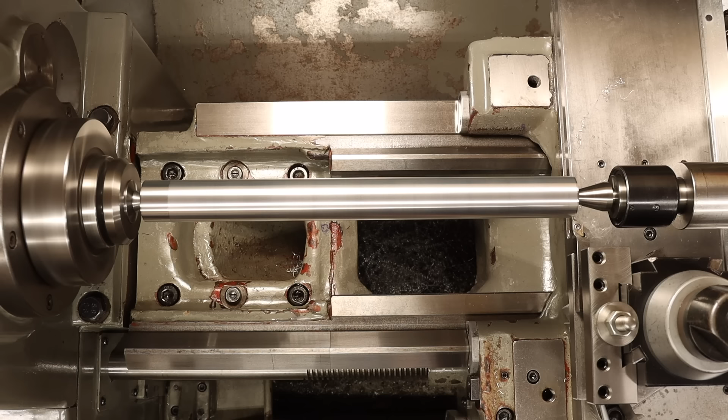This isn't the video I wanted to make because I made a mistake. A mistake that I've been living with for the last 3 years, 2 weeks, and 4 days. That's 26,712 hours of frustrating workarounds, 1,602,720 minutes of self-righteous ignorance, 96,163,200 seconds looking everywhere but at the problem itself, thinking the problem was too big to bother until the bother became bigger than the problem, and the problem, as I would discover, was a lot smaller than I thought.

So the mistake. We'll get to that in a bit, because first I have to talk about the problem. This lathe is not very straight. I mean, to you it probably looks fine, but straight is a relative term in machining, and relative to my standards, it's not straight at all. The trouble with an unstraight machine is that it makes unstraight parts, so almost everything I turn with this lathe comes out slightly tapered, unless I give it a calibrated whacking.

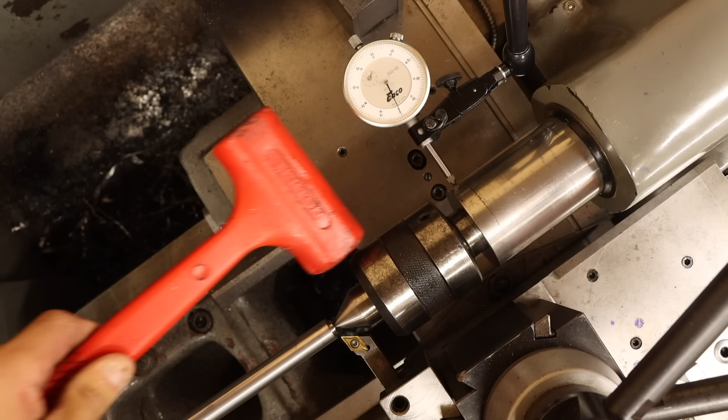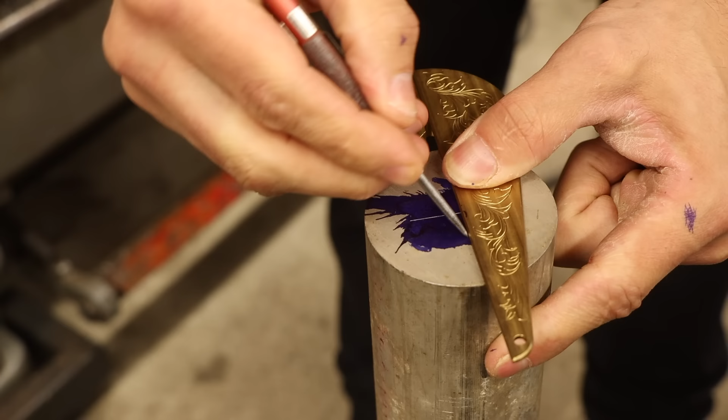Now, a few years ago, I did give this lathe what I considered at the time a proper leveling job, but my standards have since increased, or more accurately, my patience has decreased as I'm tired of working around this wonky lathe. There are a lot of factors that could be causing this, so I'm going to start with a bar test, which is exactly what it sounds like unless you're a law student. I'm going to turn the longest bar I can and see how straight it comes out.

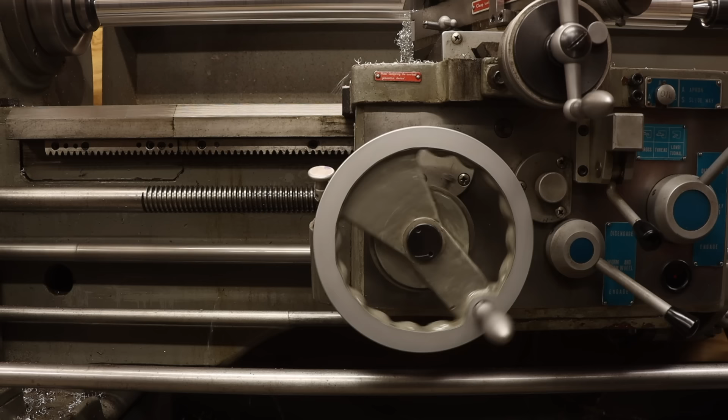If this lathe is all wonky, the bar should match that wonkiness, giving me an idea of where I need to pay attention. This also happens to be the largest single part I've ever turned in this machine, between centers no less. But this is necessary so I don't end up with any other outside influences like a chuck throwing another variable in the mix. I only want to look at the effects the bedways have on the carriage as it goes the full length.

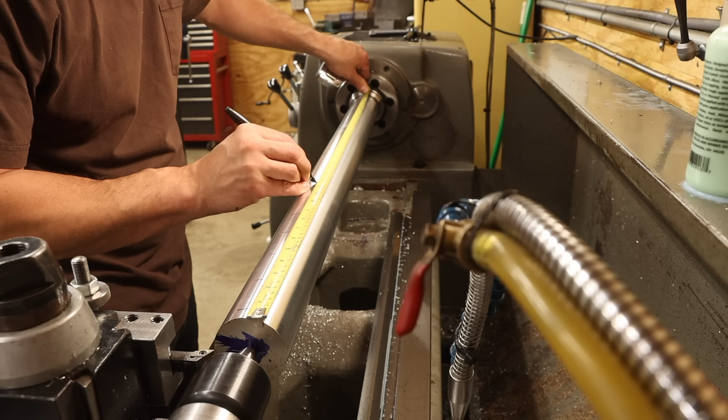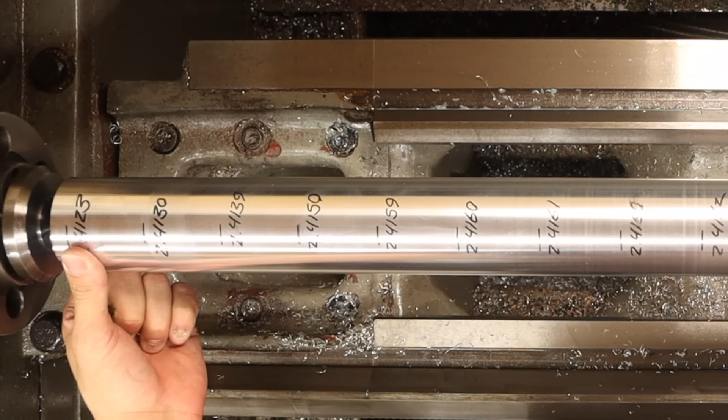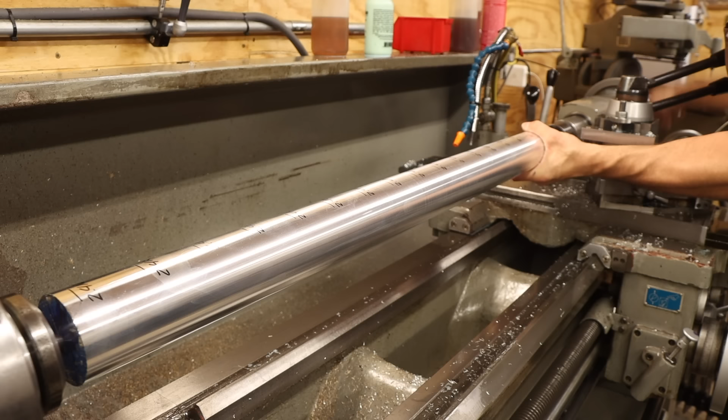Ignoring my arbitrary hand gestures, it's clear there's some variation here. A pretty steep increase in diameter of about 4 thou in the first 8 inches, then it sort of hovers there through the middle and drops 1.5 thou in the last 10 inches. So a max variation of 4 thou, or about the thickness of a single human hair. A lot of people would probably say that's good enough, but not I. The good news is now we know where we stand and all we have to do is make it better.

Last time I did this, I used a precision level on the lathe's carriage and moved it around while I made adjustments to the leveling feet on the ground. More important than leveling though, the feet are needed to twist and contort the lathe so that it comes out straight, something that it won't do just naturally because of its sheer weight. The trouble with my approach last time though was that the carriage is so wide it ends up averaging out the wonkiness of the bedways, making it harder to really nail down what's going on. So we're going to skip the carriage altogether and design a fixture that will hold the level for us.

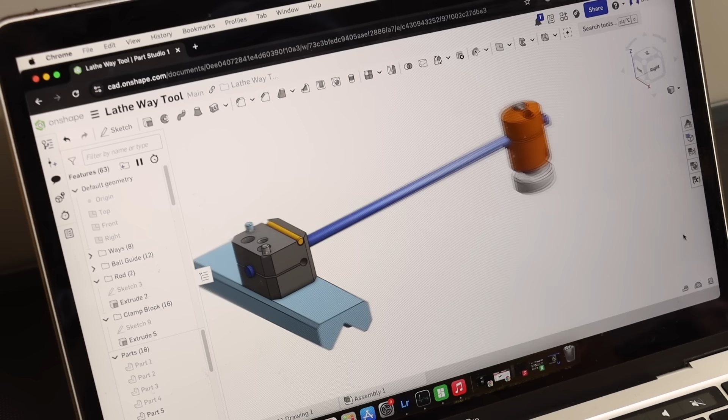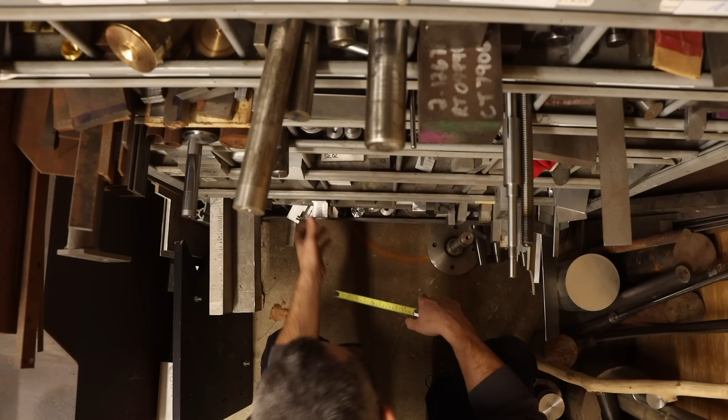Alright, here's the design. There's this piece, this piece, this piece, this piece, and this piece. You know, I think it'll be a lot more fun if I just explain as I go. So let's start with this piece. It's going to basically be a long V block with some balls. Before I can add the balls, I need the V, and before I can add the V, I need a block. But of course, not this size.

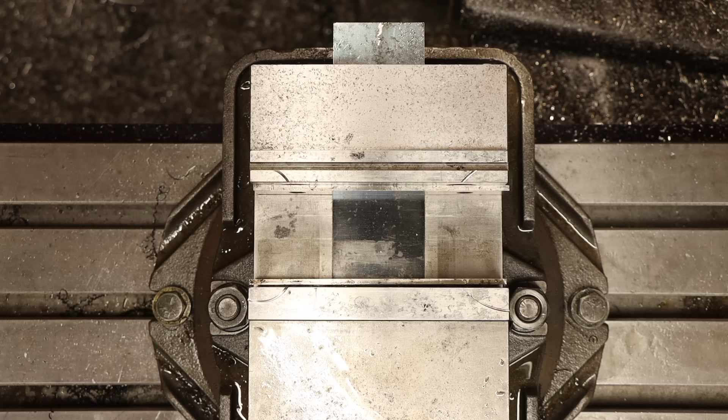I'll probably never use this offcut, but somehow this makes me feel better than the alternative. Anywho, now we can buckle in for a mesmerizing massive fly cutter sequence.

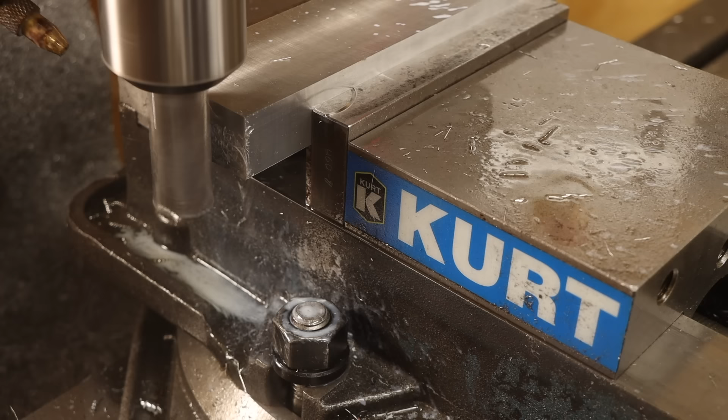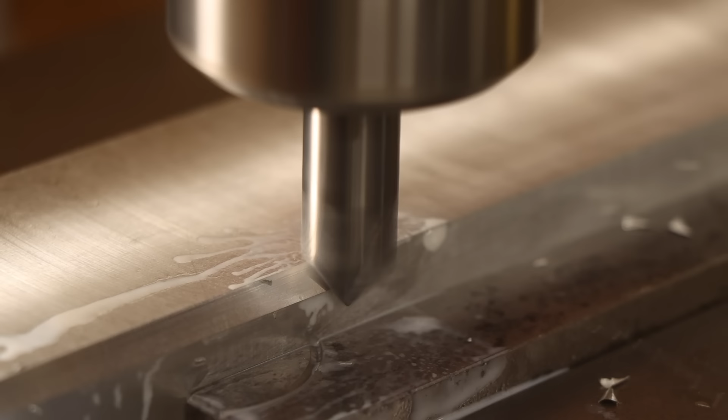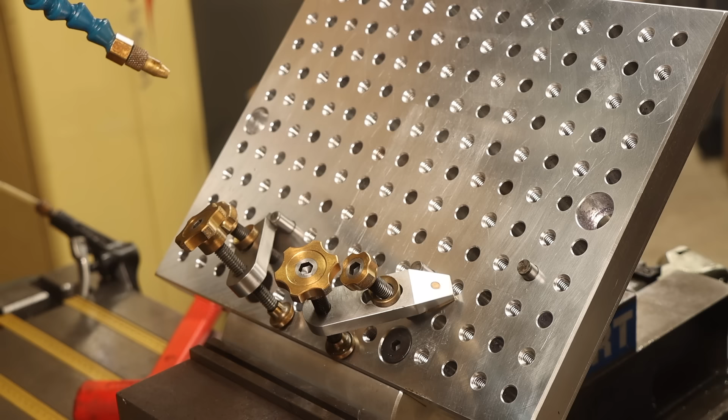To make the rest of this fixture, you'll never guess what I need. A fixture. This one has a pivoting base that I can set to exactly 45 degrees, matching the angle of the ways on the lathe. Dowel pins square up the block with everything else, and clamps keep it from running off.

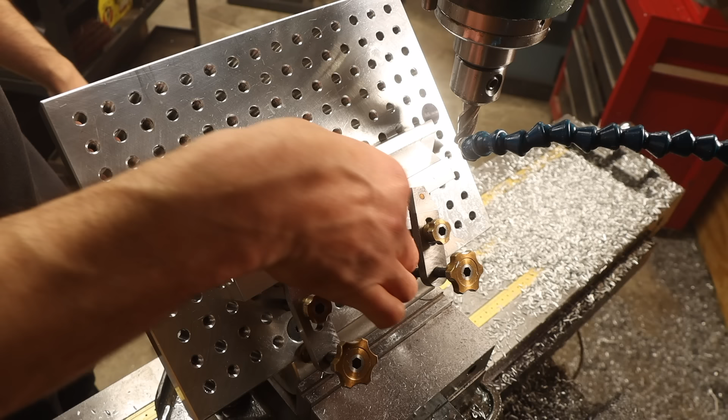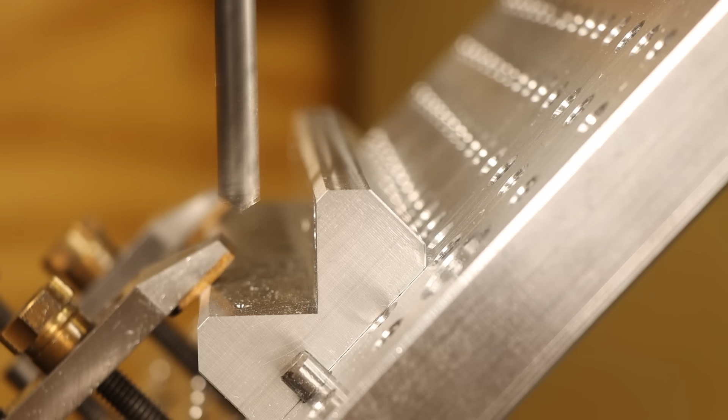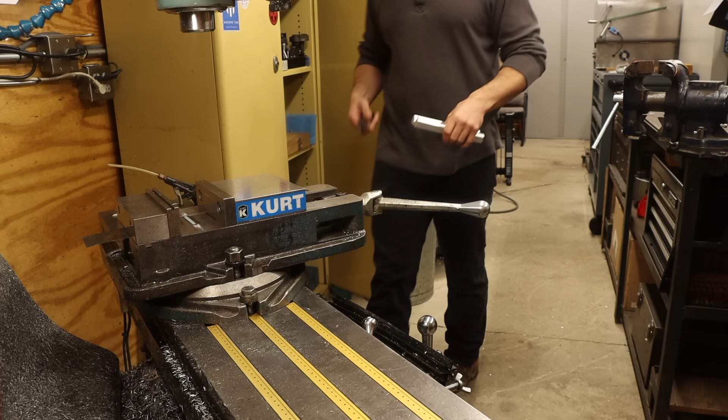Because of the fixture, I can easily flip this around to keep the V-groove symmetric, but this also applies to the chamfers and a set of blind reamed holes. Last is a simple set of countersunk holes for screws to mount this to the rest of the assembly.

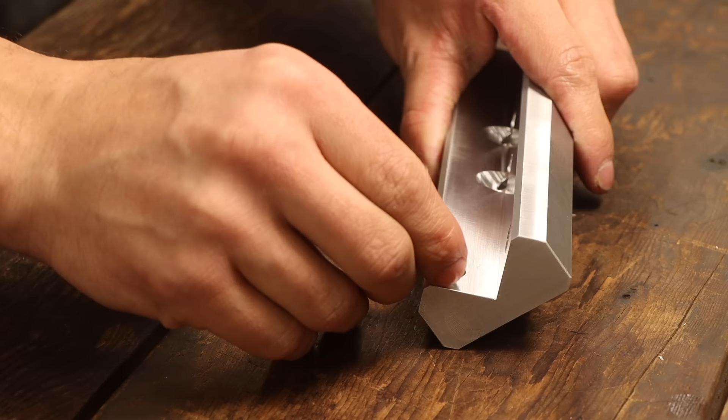Now I owe you a little explanation. Each of these blind holes is actually a press fit for some hardened steel balls. While I made this block a V-shape to match the bedways, it would be really hard to guarantee consistent contact along the matching faces. The balls remove this problem though because they limit the contact to 4 predictable points, constraining this in 4 degrees of freedom, leaving only 3 left to consider.

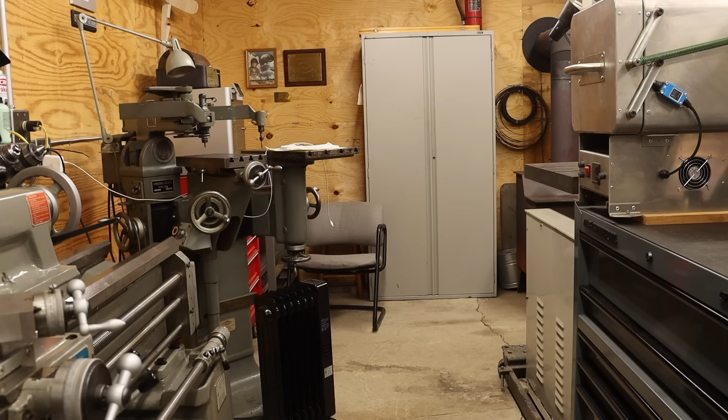The linear one, which we don't want to constrain at all, this rotational one, which we definitely do, and lastly the temporal one, which I have to pause for a minute because I just got a special delivery.

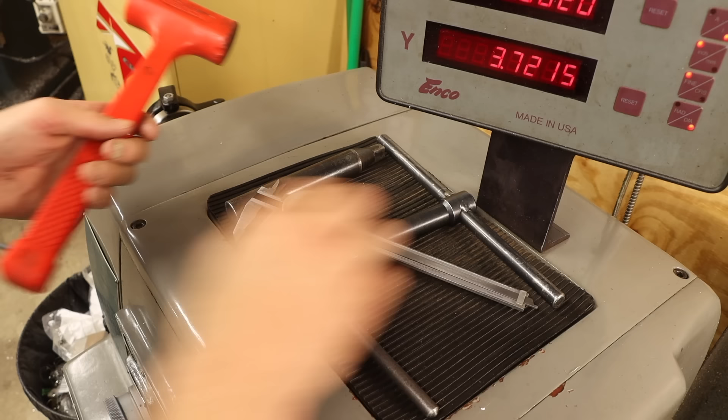You see, along with the crooked lathe, I've also been dealing with a lackluster storage situation. Anytime I need a live center, I have to fish it out of a drawer. My chuck wrenches just end up piling up here, and some of my more commonly used tools are spread around the shop.

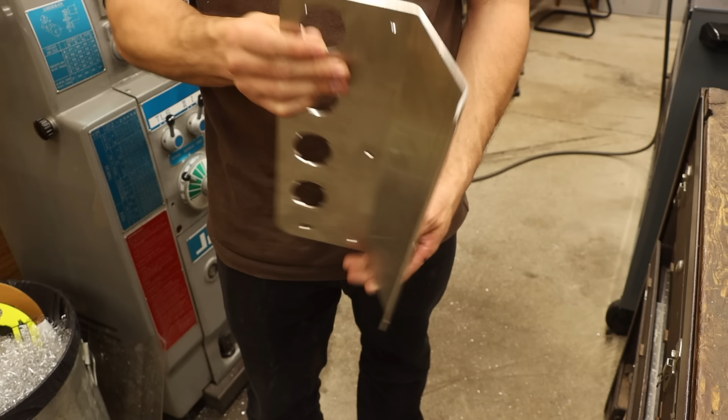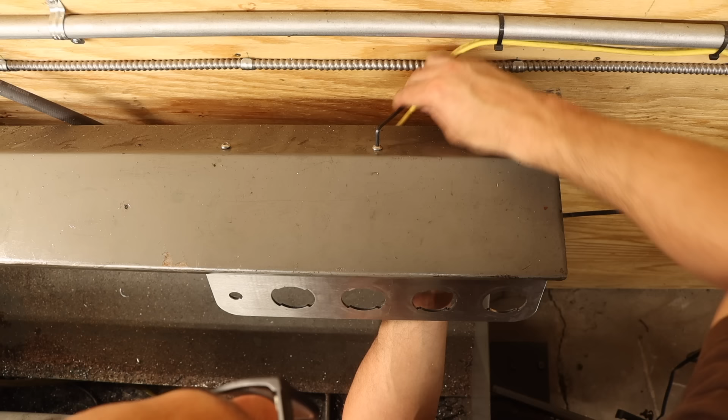Let's get these mounted. The first one is for my tailstock tooling. Drill chucks, centers, and well, I guess that's about it. But I figured the best place for tailstock accessories is by the tailstock. Down here it will be out of the way but also within arm's reach. And after adding a few 3D printed bushings to protect the tapers, bada bing.

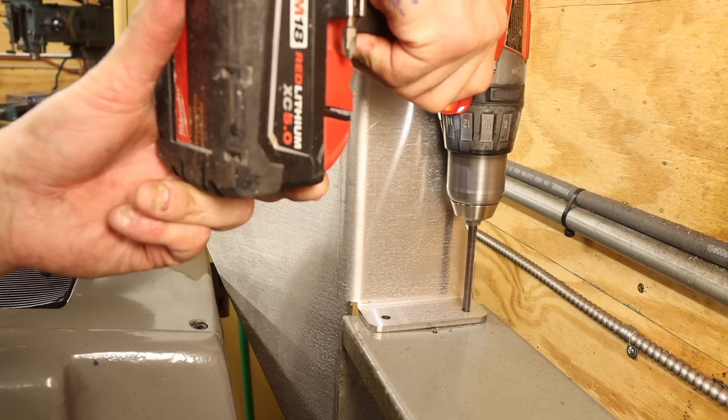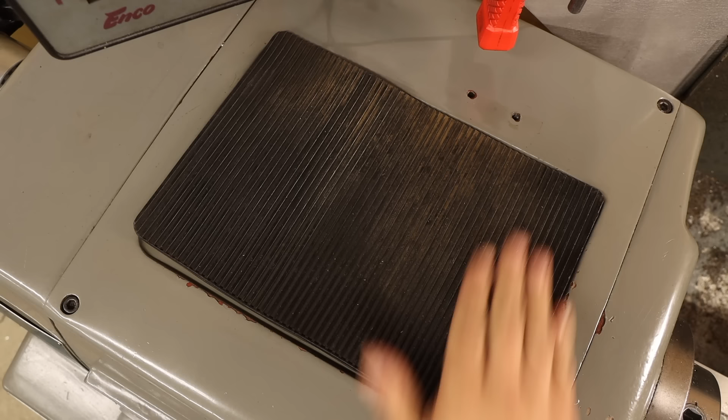The other bracket looks far more complicated than it is. It also gets attached to the backsplash with some fancy flanges to keep it sturdy, as if the thickness I cautiously chose wasn't enough. Seeing this in person gives me no doubt that it will serve as a stable foundation for the 2-pound DRO. And of course all the tools needed up at this end of the lathe. Finally freeing up the top of the machine. For more stuff. Man, who knew brackets could be so sexy?

Anyway, we were in the middle of something. Back to our leveling fixture. The next piece is a block which, as you can predict, needs to be square. But we all know how that goes by now, so I'll jump ahead to the part where we start poking holes in it. First are 2 through holes in what I'll call the side of the block.

And after tipping it over, I can mill the top of the block to its final dimension, leaving a partially revealed hole that will make sense later. But from here, it's just a bunch more holes. Some reamed, some threaded in, some countersunk.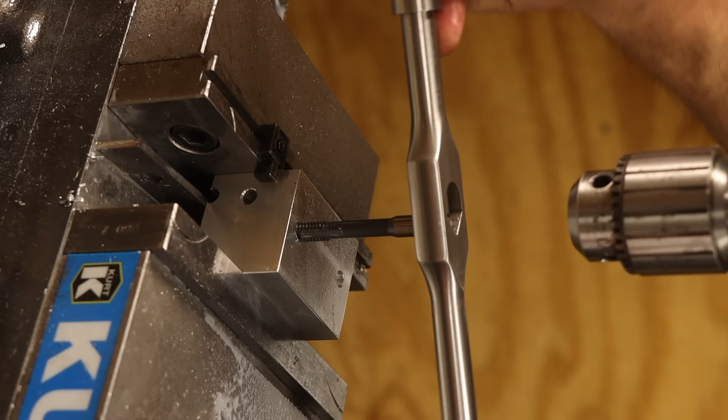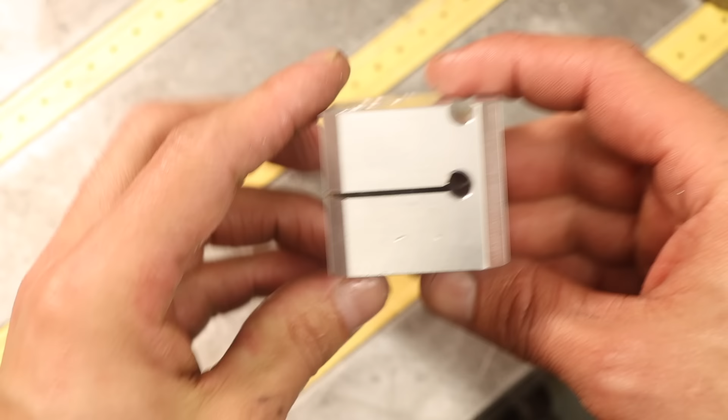Of course it wouldn't fit in without a few of these. Then a nice big slitting saw cut to nearly chop this in half. It's going to bug me that the hole and saw cut aren't centered, but not enough to remake this. So let's add it to the leveling fixture.

First, a long dowel pin is driven through the weird half-hole thingy, then some short dowels go on the top. This then gets attached to the bottom of the V-block from underneath. And a precision ground shaft that I let someone else make goes in here and is clamped tight with screws. Meaning we just have a couple more parts on this end to whip up before this whole shindig makes sense.

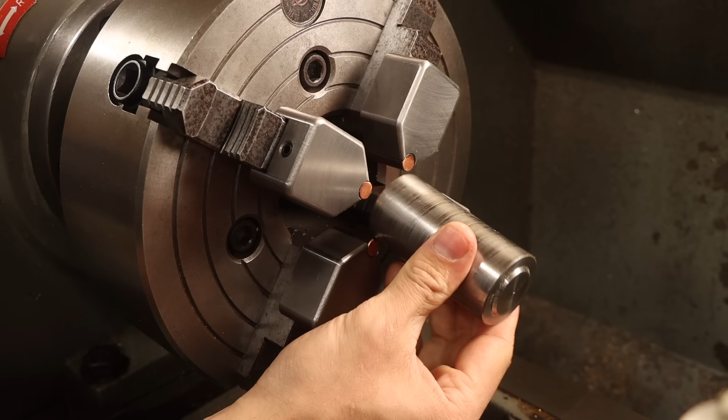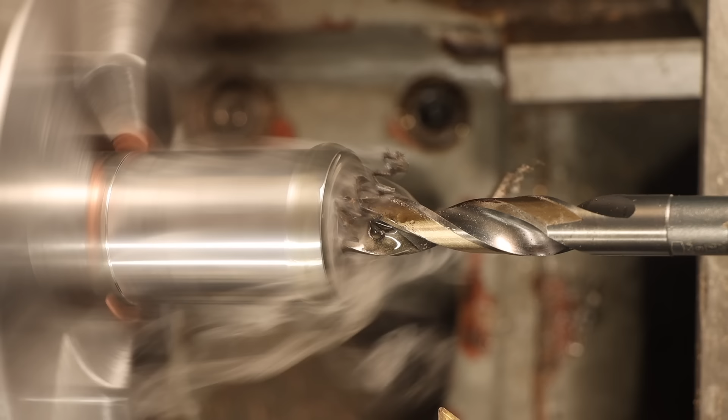Fortunately, we get to play with the lathe a bit this time, starting the usual way, of course, with some facing, turning, and drilling for a tapped hole. I chose an oddball tap specifically for its finer pitch, and of course I don't actually have the right drill size for that, so I'll have to bore it to the right starting diameter before I can actually use it.

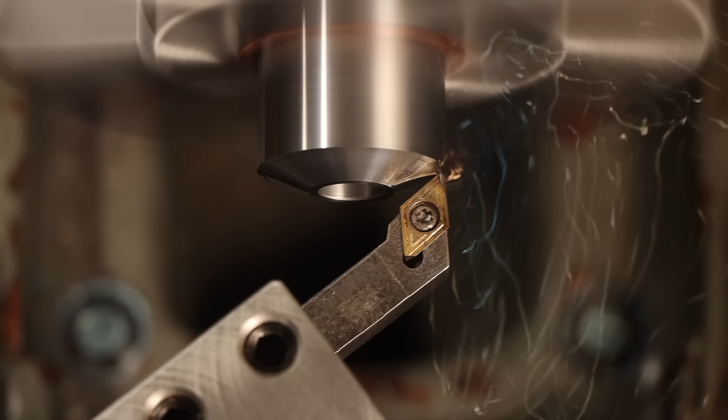After centering up the other end, it also gets a hole, reamed this time, then a big old chamfer that looks cool but is also needed for clearance. The rest of this is a job for the mill. The first hole is for mounting to the crossbar of the assembly. It's also my reference for the remaining features.

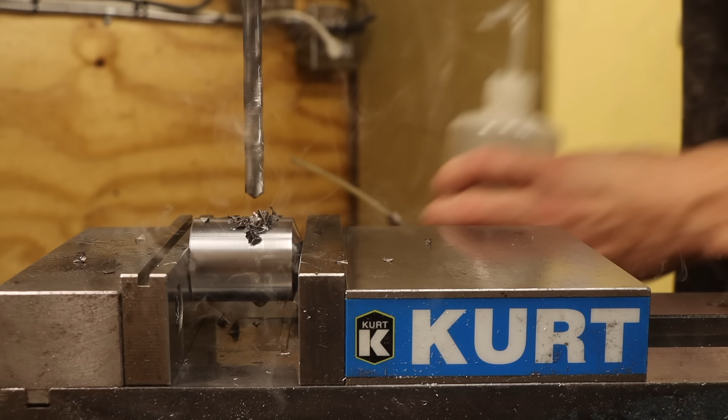So for the next hole that happens to be perpendicular to this one, I can slide a gauge pin in here, then rest that on 1-2-3 blocks to square it up. It's a similar story for the top hole, only this time because I have to use V-blocks to square it up, I'll use the dial indicator and compare it on both sides of the gauge pin. Yet another gauge pin helps me find the center, and then it's just more of the same.

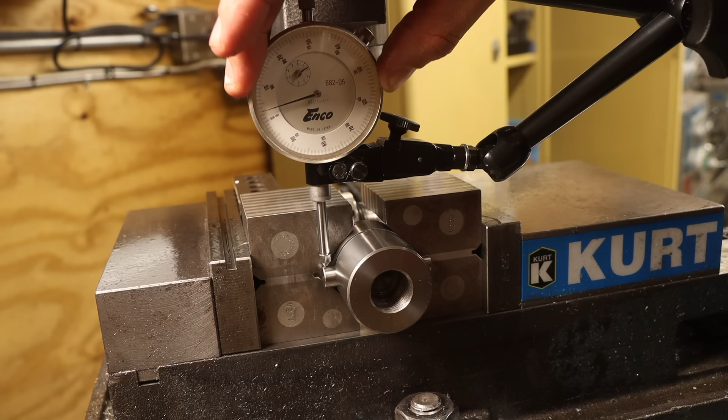Finally are the clamping slits like I did on the previous block. The first I can knock out in this setup. The second though I have to turn on its side, so I'll use the gauge pin indicator method again to make things square.

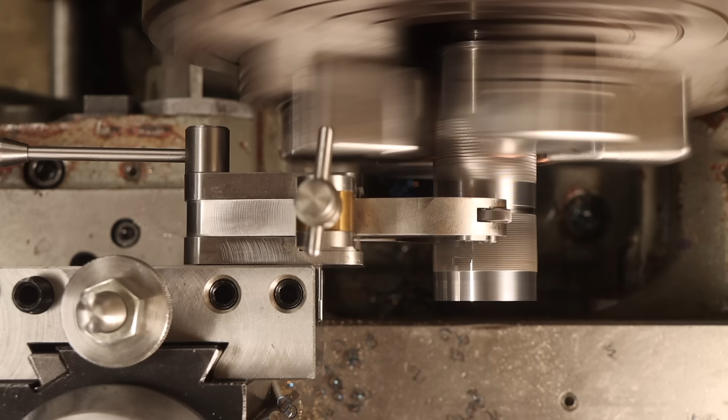Alright, just one more piece to make which screws in here. This one is all turning. And because it's a thumb screw of sorts, after getting the outside to diameter, I'll add some knurling. The stem then gets turned down to its final size and threaded to a perfect match.

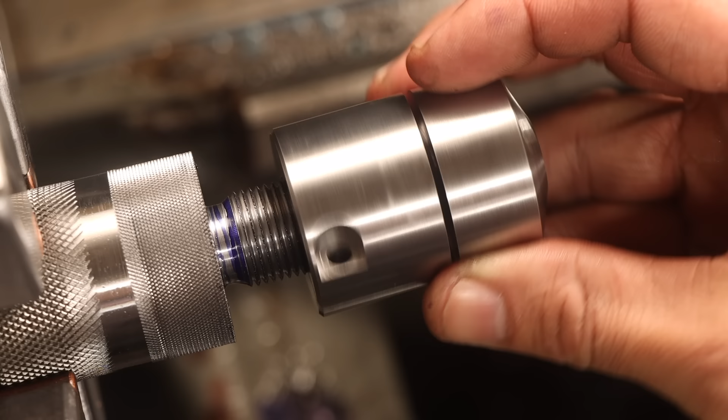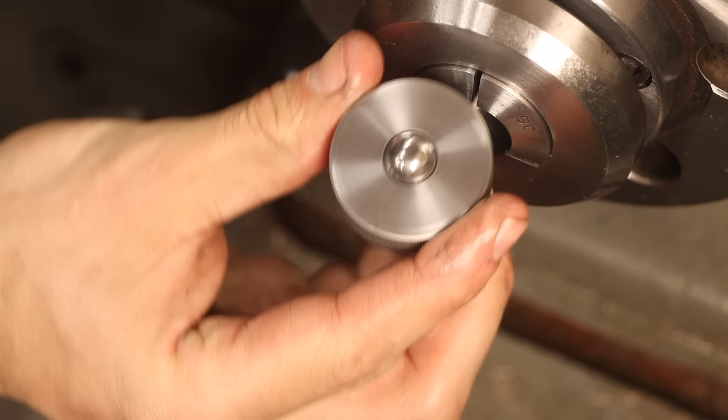To do the other end, I have to hold on to the threads, and the best way to do this without damaging them is with the collet chuck. So after facing this side to length, I can add the last and final hole, and that's it. Now let's get this all together and see if I can explain what it does.

I mentioned before that the 4 balls in the V-block take care of 4 degrees of freedom. With the addition of these last few bits, a ball now rests on the opposite bedway, making this whole thing a steady platform for my level. And that's what the ball and pins on the top of this assembly are for.

They basically give me the same constraints for the level so I know it's in the same exact position on the fixture every time. And to actually get the level, I can adjust the thumb screw on this end and lock it in place, which means we're ready to use this thing. I think a good first step is to just see where we stand along the length of this bed. But I'll go ahead and skip the part where I haphazardly took readings and jump to the more scientific part.

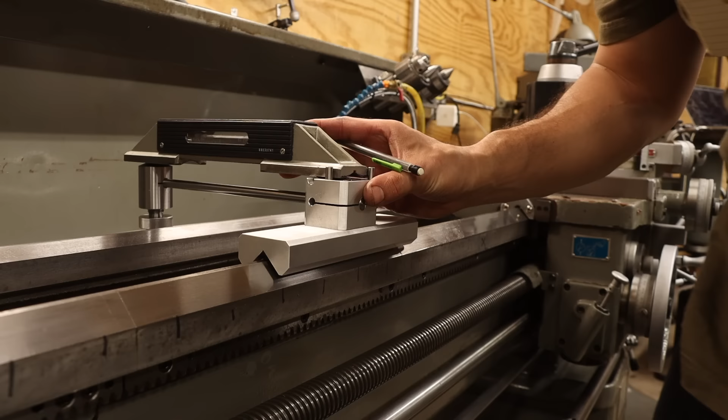When I cut this test bar, I took measurements every 2 inches, so it makes sense to do the same for these as well. I think it's also worth mentioning that this isn't your average level, though if you have eyes, you probably could already see that. Each of the tick marks on this level equals 0.02 millimeters per meter, or 2.5 ten-thousandths of an inch per foot, which is a mind-bogglingly small measurement.

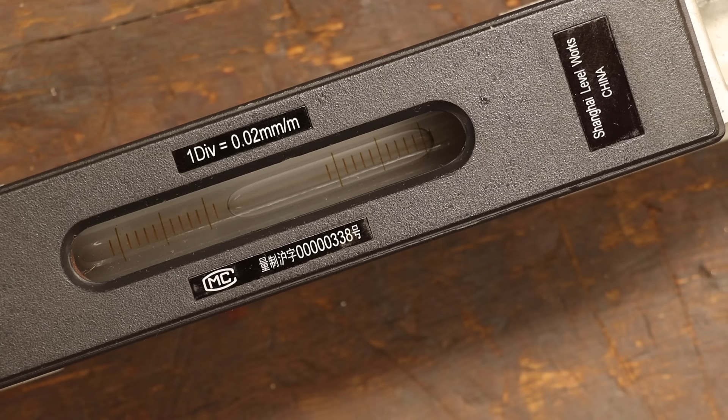Imagine taking a level meter stick or yardstick and placing a single hair under one end. That would move the bubble on this level 6 whole tick marks. So we're really getting into the nitty-gritty here. But obviously this is important because, as you probably remember, my test bar didn't come out even remotely straight. And comparing those diameters with the level readings I just took, there's a clear connection.

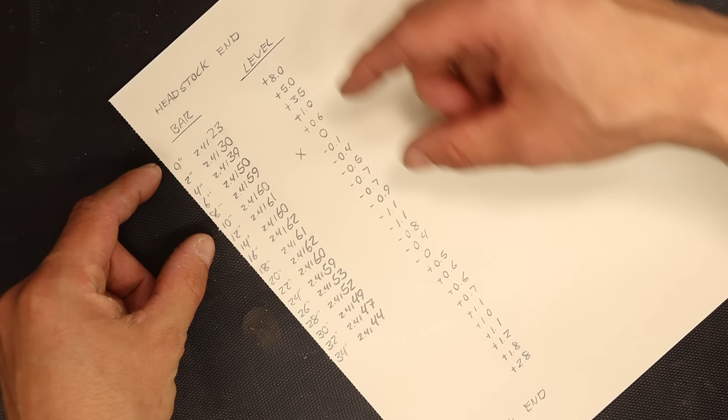Where the front side of the bed is high, the bar cut smaller, and where the front side is low, the bar cut larger. This makes perfect sense too because when you look at the carriage, if this side goes down, the cutter moves away from the spindle, making a larger part. Just seeing these two sets of numbers match up is very promising.

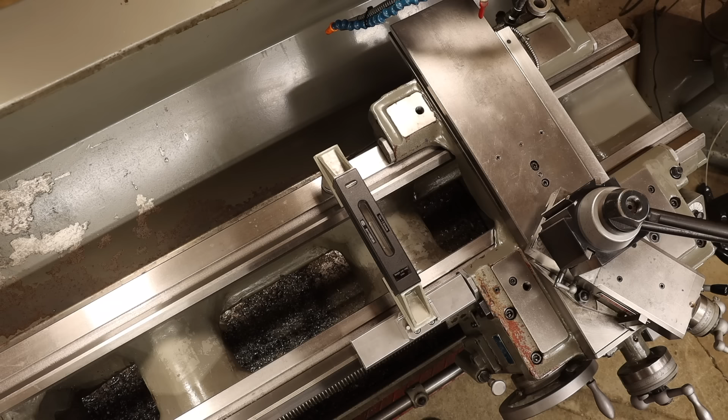But what's still a complete mystery is whether this variation is coming from my lackluster lathe adjustment or from something much deeper. Bed wear. I had this question in mind when I made this fixture, so I can actually check this pretty easily. I'll use the inner tailstock ways as a guide to measure the outer carriage ways, which should be reasonable considering the tailstock ways probably see less than 1/100th the amount of use and wear the carriage ways do. So I should be able to measure the difference in wear between the two.

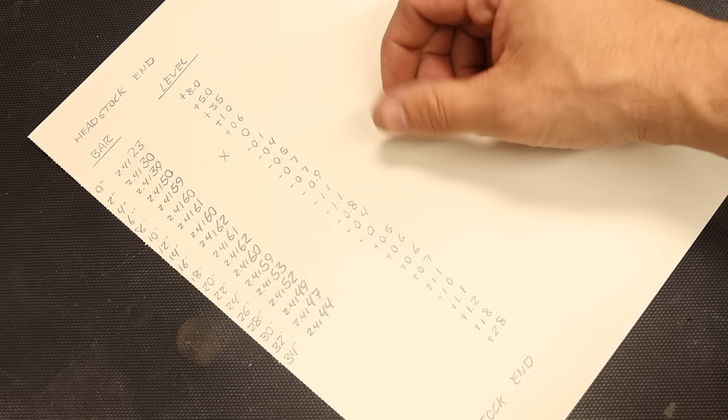Or not. Literally less than a ten-thousandth difference across this span. And basically the same everywhere else, if not better, including on the back set of ways, but it's not all great. The first 8 inches or so is a little rough, and this seems to match the same crazy differences we saw in both the test bar readings and the level readings. So I definitely have something to address around these parts.

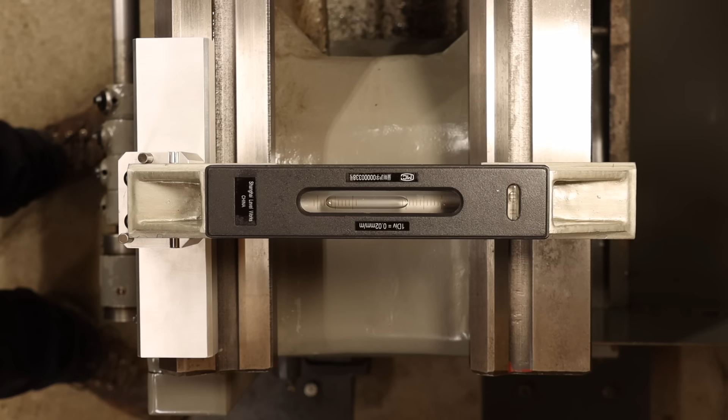But before I get to that, I want to tackle what I'm hoping is just some low-hanging fruit, that being the rest of this lathe. The variations are pretty small, so I'm hoping I can adjust these away. I'll start with the twist I was seeing. According to the level, the right front end of the lathe is reading high, so I can just lower the right front leveling foot a smidge.

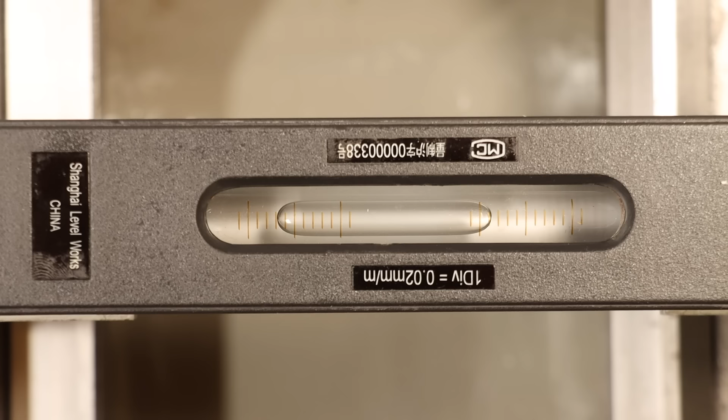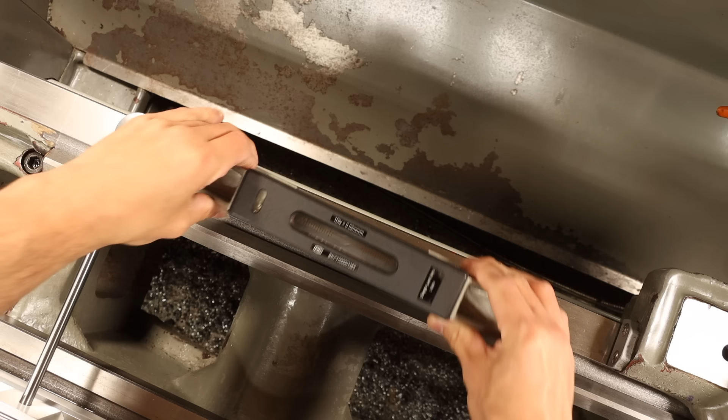Perfect. But now I'm seeing another problem. Both the left and right ends of the lathe are level, but now the middle is low in the front, or maybe it's high in the back. I don't really have a good way to know, and it only just now occurred to me one small deficiency in this leveling fixture. There's no way to mount the level like this, which would be really helpful right about now. So I'm left with a decision. Either I could spend another couple days modifying this fixture, or I could just put the level right on the ways. Yeah, let's go with that.

Of course, this means to use the level in this direction, the lathe also has to be level-ish in this direction, which it's currently not, so some quick adjustments are needed on the 4 feet at this end of the lathe. Of course, at the same time making sure not to reintroduce any twists that we already removed. But once I get it there, we can see what's actually going on. The left side reads high on the left, and the right side reads high on the right, meaning only one thing. The whole lathe is sagging in the middle.

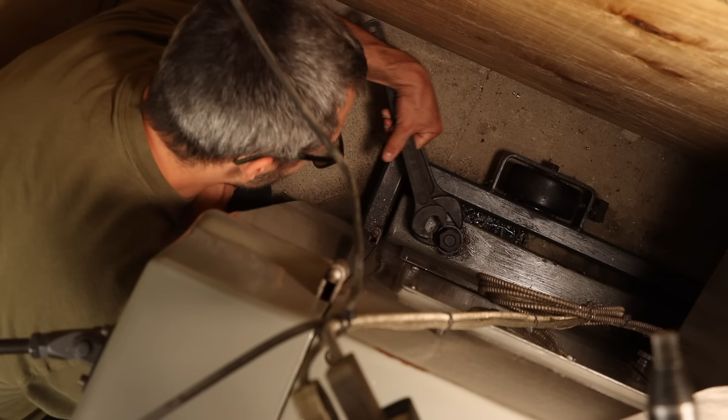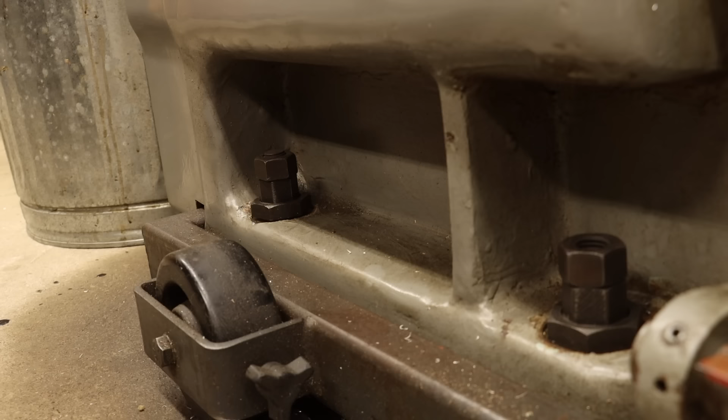But that's exactly why there are 4 leveling feet on this end of the lathe. Letting the pressure off the leftmost one should let the weight of the gearbox bend the ways back up to flat, which is exactly what they do. Now the back way is level at both ends, and the front is mostly there but still drooping a hair. But since the leftmost feet are already completely off the ground, there isn't much left I can do to lift this up. Trust me, I already spent a couple hours making every combination of adjustments possible and no dice. This is as good as it's gonna get.

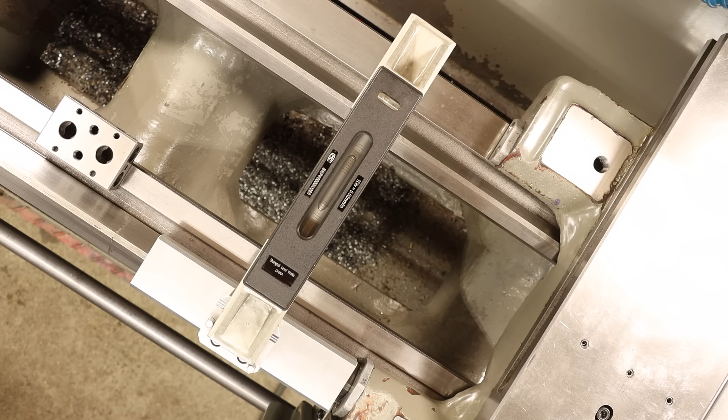And in the grand scheme of things, it's only about a half-thou drop in this one area. So I guess I can live with that. Or rather, I guess I have to live with that. But there's still one more area to address that I'm absolutely not going to accept. This front 8 inches. Like we already saw, this is by far the worst offending section. And I think it's no coincidence that it's the only removable section of the lathe bed. I mean, the level says it's bad, the indicator says it's bad, and I can literally feel the seam with my fingernail. So, after years of cutting tapered parts, let's see what the hell is going on.

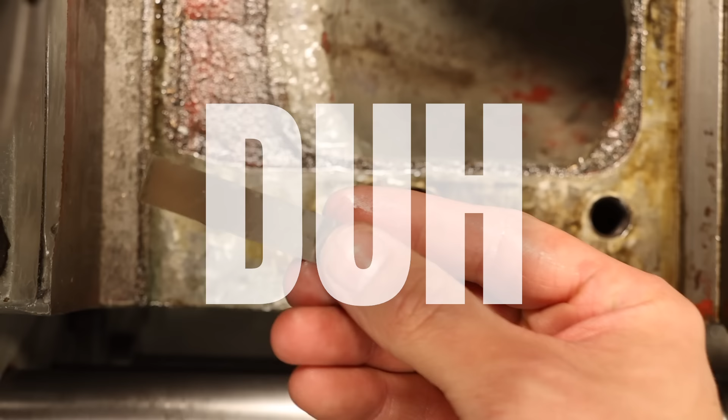Oh. Duh! I'm no Sherlock Holmes, but I think I just found the problem. I completely forgot about this shim I've been sticking in here. I mean, in the back of my mind I knew it was there, but I never really put 2 and 2 together. When I leveled this lathe years ago, somehow I determined that this was needed to get things straight, but apparently that was way, way wrong. And it would explain exactly why I've been dealing with a taper problem ever since. Literally 3 years of trouble, and it was all my doing.

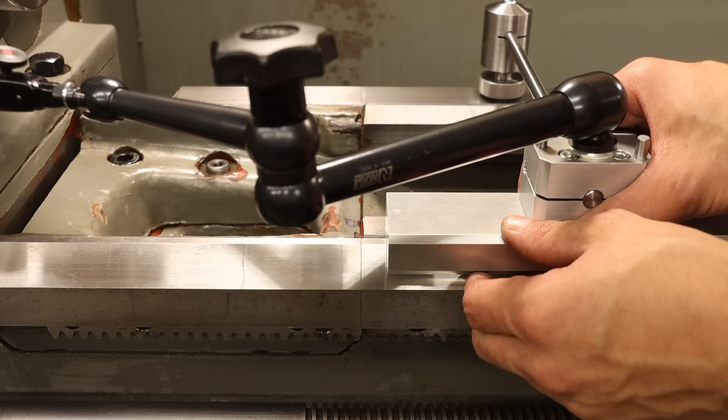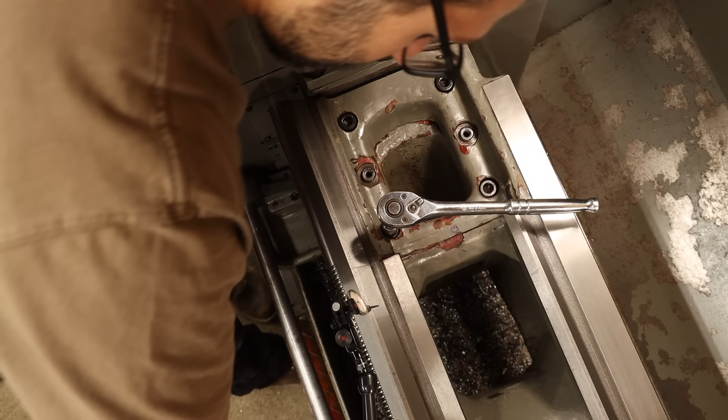I think the answer to my problem is pretty obvious now. Let's put it back together, without a shim, and see what it looks like. Okay, so that didn't completely fix the problem. The far left indicates nicely, but there's a sharp drop right at the seam. Not much though. Despite my better judgment, I tried my thinnest 1.5 thou shim on this side, and it was too much. And making it thinner wasn't an option. I don't have anything else smaller, so I had to get creative.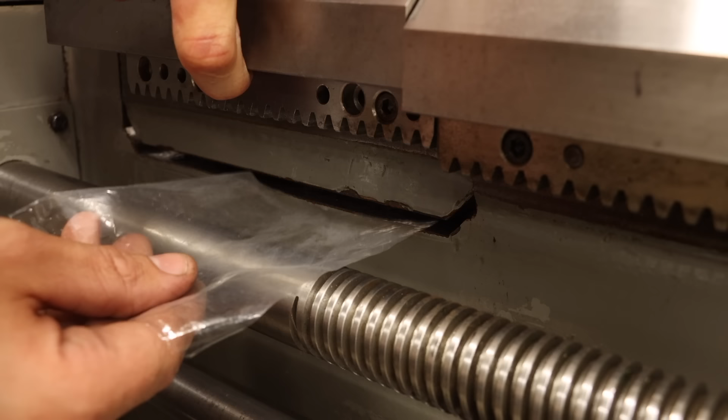This plastic bag sheeting isn't any thinner, but it is squishier, so I might be able to smush it down to the thickness I need. And sure enough, with the right amount of torque on the bolts and enough whacks with the dead blow, that is exactly what I needed. Now the readings from the bed to the removable section are nearly indiscernible, and that goes for both the front and the back. And if the indicator is any indication, I think it's safe to say that this lathe is extremely straight now.

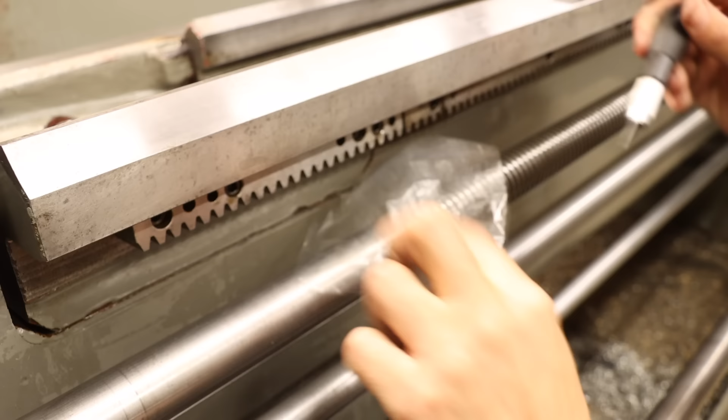But that doesn't mean it will cut straight, at least not yet, because there are a few more adjustments to make. The lathe spindle is adjustable and it needs to be parallel to the bed ways, and considering we just made a pretty drastic change right here near the spindle, I would bet money that they're not aligned at all. Okay, so not as bad as I was expecting, only 6 ten-thousandths, but we're all set up here, so might as well try to make it a little better.

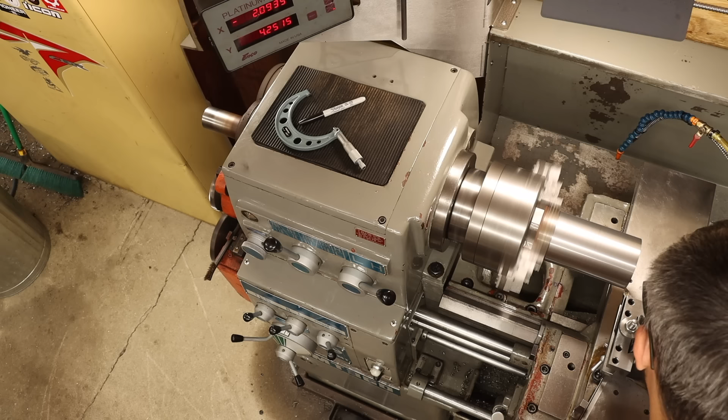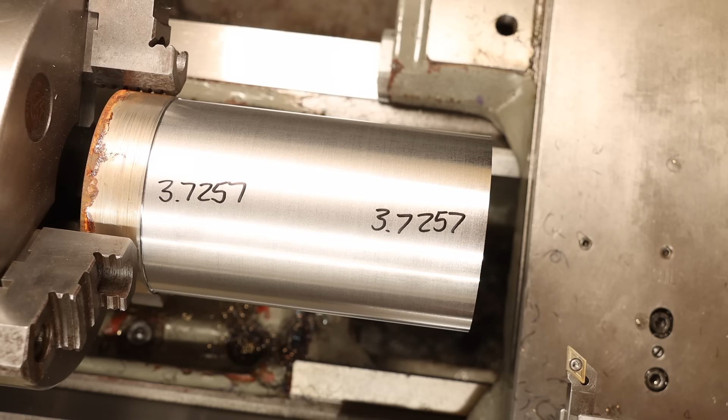If you were here 3 years ago, this whole thing probably looks very familiar, including this exact hunk of steel and these very poorly accessible adjustment bolts amidst the gears and belts at the back of the lathe. But despite the hassle, after a handful of tries, I think I can say I've got it pretty dialed. Which brings me to the last and final adjustment, the tailstock.

So after getting our bar from earlier mounted between centers and taking a short cut on both ends, we can see there's definitely some misalignment, which shouldn't come as a surprise given everything else we've just shifted around. Luckily this one's an easy adjustment, or rather maybe I'm just really good at it from years of practice. Anyway, I can see there's about 4.5 thousandths difference between the ends, so I'll use an indicator to guide my adjustments, which is a matter of loosening a couple bolts underneath and using the screws on the side to shift it left to right.

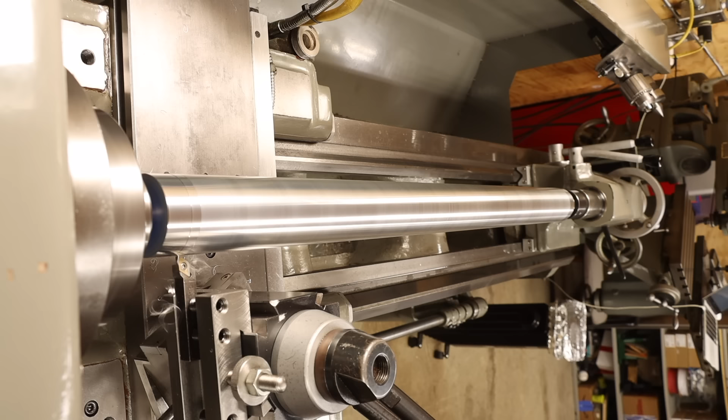After one more adjustment because I realized I went the wrong way, I've got both ends bang on the same diameter, which means now we can finally turn the whole length and see just how straight we got this thing. Okay, so it's not going exactly to plan. Being as long as this is, I'm getting a lot of chatter and vibration near the middle. I tried different speeds, feeds, coolants, and even the follow rest, none of which really helped.

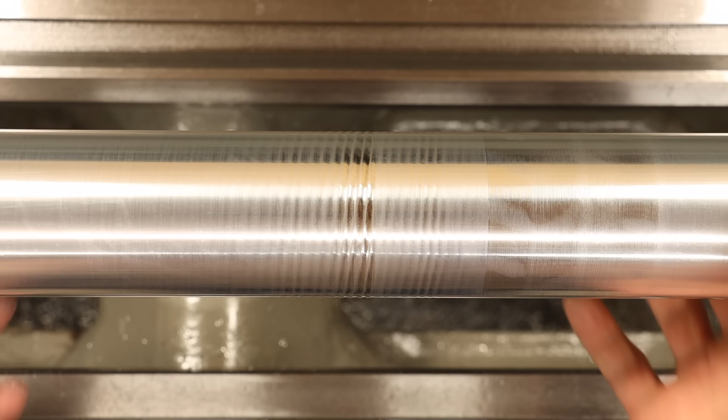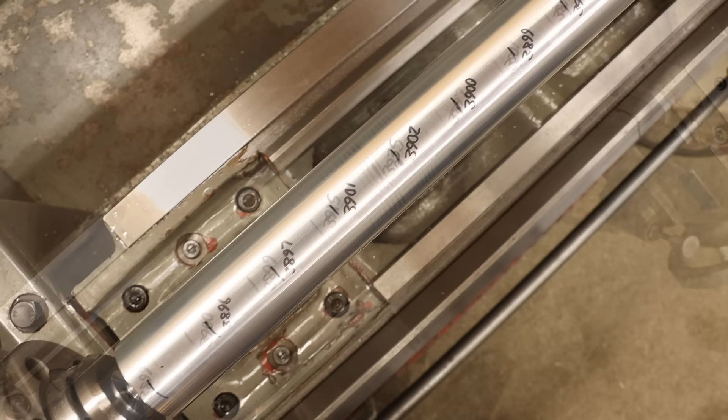But I did happen to get lucky on one odd pass where the vibrations only happened for a very short window, leaving the rest of the bar true to diameter. So I think this is going to be my best shot at measuring. If we just ignore the 2 outlier dimensions where things got shaky, this is literally incredible. The majority of the bar falls within about a half thou window. Half a freaking thousandth of an inch over 36 inches. That's literally 8 times better than where we started.

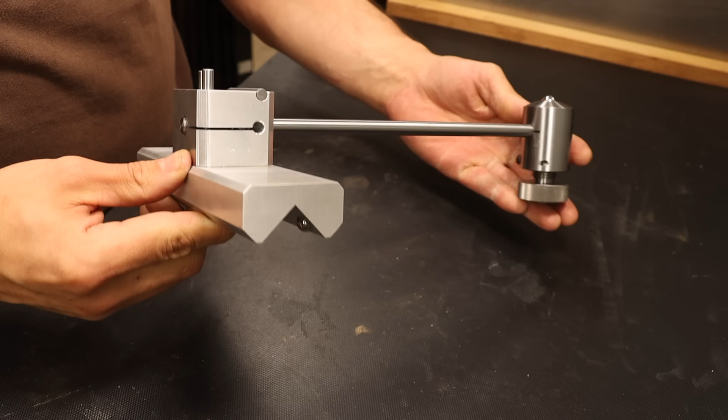I'm going to go ahead and call this a victory. Though it is genuinely painful to know that I've been living with a problem that I caused for so long. But I guess on the bright side, it shows I learned something, even if it took me 3 years to do it. And now I have a nice little tool I can use next time, because who knows, maybe 3 years from now I'll get fed up again and need to make this lathe even straighter.